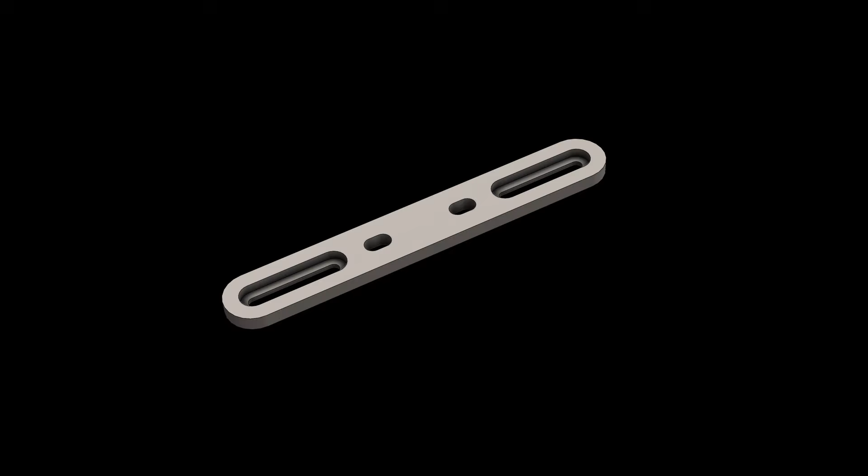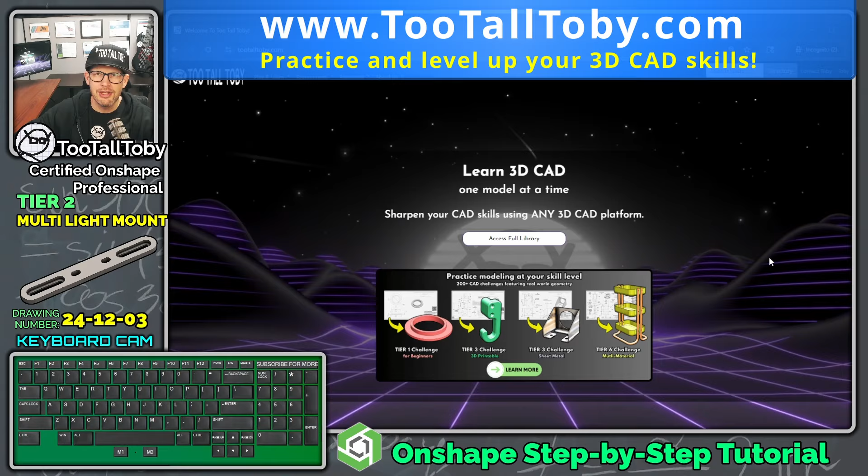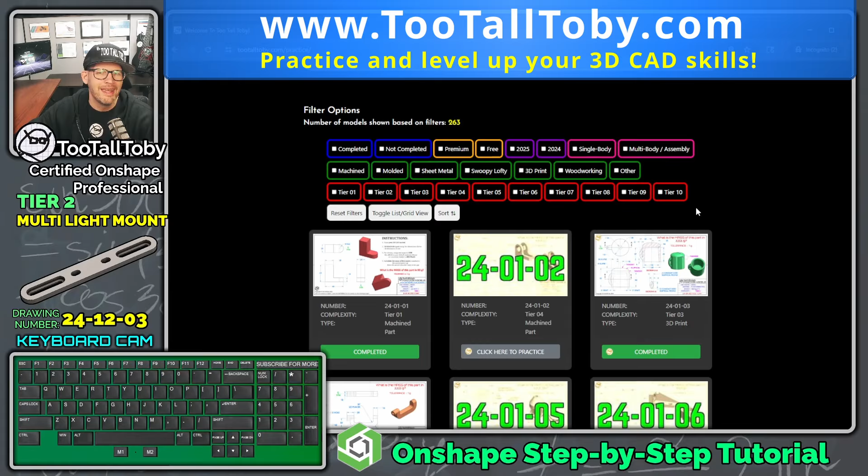So you can see here, if we access the full library, there's over 250 challenges, quite a few challenges here, a little bit difficult to sift through, except that we've got these amazing filters right at the top of the list. So if you're brand new to CAD, you could start out on Tier 1 challenges. These are the easiest challenges in the library, but we've already gone through all these. Each one of these has a tutorial.

So let's move on to Tier 2, and we can see that the next Tier 2 challenge that we're facing is this one here, 24-12-03. So we're going to click here to practice, and it looks like there are 160 people who have successfully solved this, and it's got an average solve time of 7 minutes and 53 seconds.

So let's get into it here. Click here to begin, and go!

So the question here is, what is the mass of this part in XXX grams? The tolerance is plus or minus 1 gram. The material is 1060 aluminum, and the unit system is millimeters. A little bit of a tricky part here.

We do have some symmetry, so that tells me we could maybe model half the part and then mirror it at the end. But let's take a look at our game plan here.

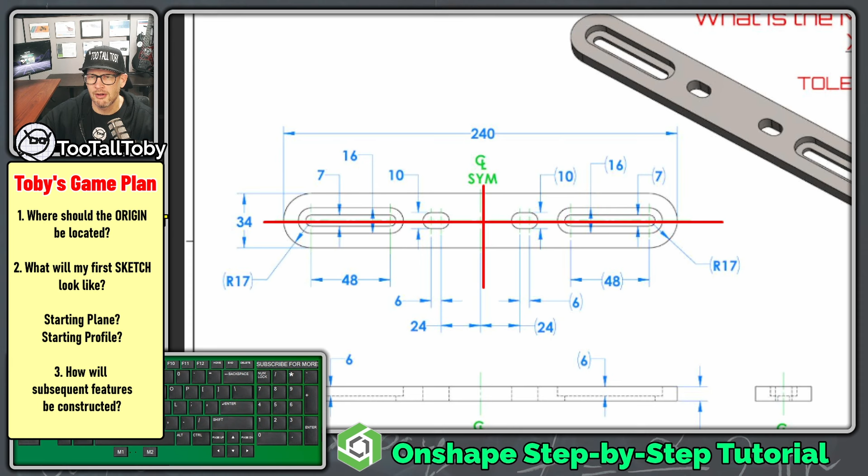One of the first things we're going to ask ourselves is, where should the origin be located in this model? And I think since we've got symmetry in this direction, and it looks like symmetry in this direction, I think that what we could do here is we could say the origin is going to be right here, right at the middle of the part.

And when I'm not really sure how the part is going to be used, what I'll typically do is put the origin on the very bottom of the part as well. So now we have a good location for the origin. Now we can start talking about what our game plan is for this model.

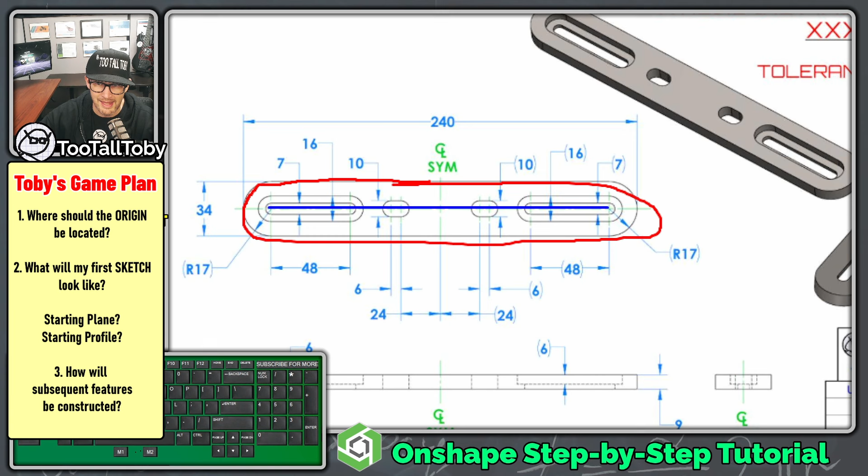And I think what I'll do is my very first sketch is going to be just a line in Onshape. And once I create that line in Onshape, what I can do is I can use the slot command to kind of offset that line out to a slot shape. And then I'm going to take that shape and extrude it up to a height of 9 millimeters. Now from there, what I can do is I can focus on these shapes over here.

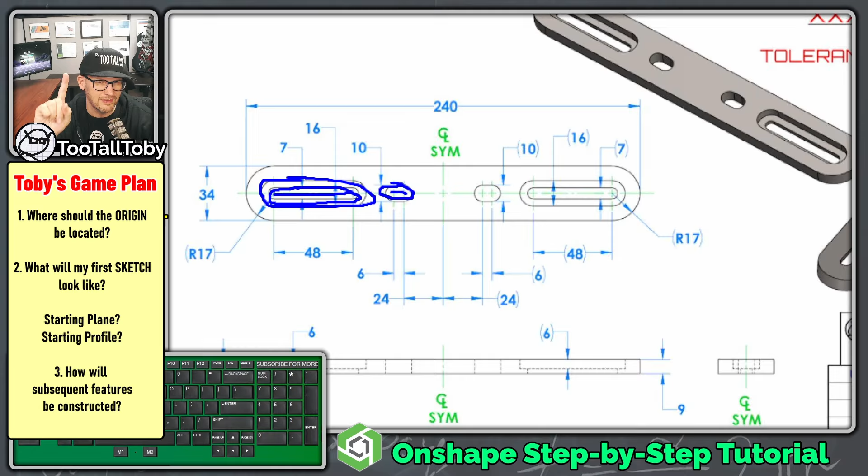So I think what I can do is once again create a line and then offset that line to create this inner slot and offset that line to create this outer slot. And maybe I'll also create a line here and then offset that geometry to create this slot. I think I'm going to do that all in one sketch. And then I'll use that sketch for 3 different features.

So what I'll do is I'll make my first feature here as this slot. I'll make my second feature as this slot here. And then I'll make my final feature as the kind of counterbore slot shape that's only going down to a depth here of 6 millimeters.

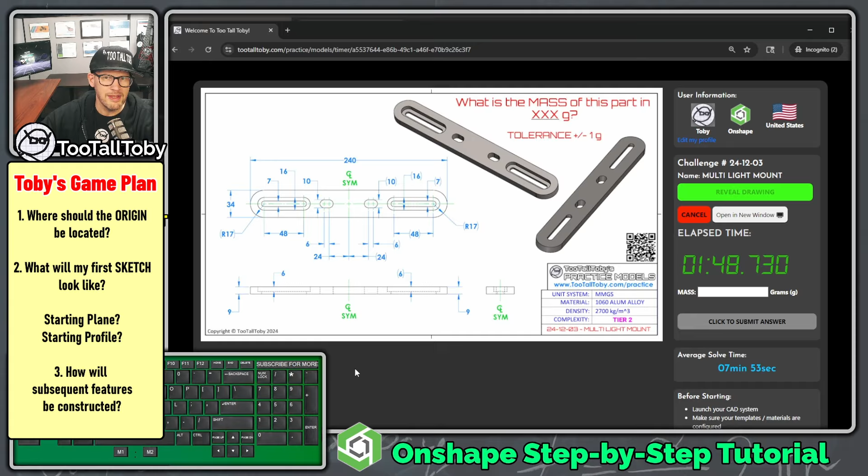And once I'm done with that, I should be able to mirror those slots over, and then I should be done with this model. So it's going to take a few features, it's going to take a little bit of advanced functionality, but hey, this is what's nice about going through and doing these practice models. We get to learn some new functionality in the software.

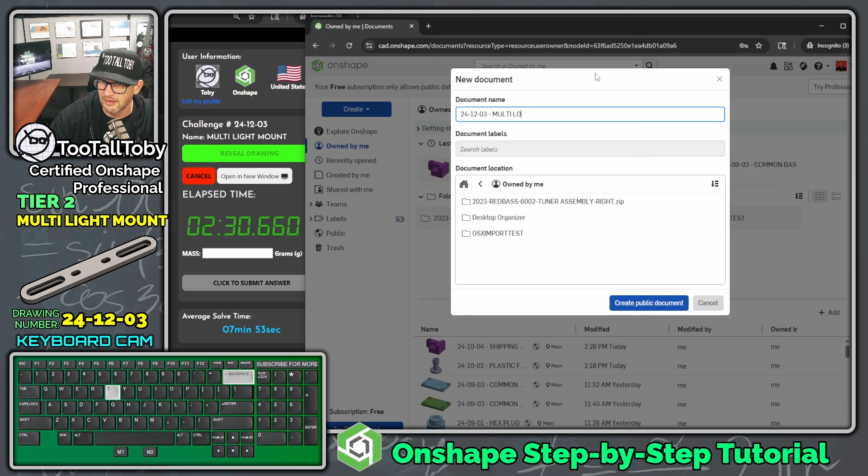So here we are in Onshape. We're going to say create document. 24-12-03 multi-light mount. And I'm going to create this in the public space. So if you're ever in Onshape, you can search the public space and you can find this model in case you get stuck or you want to see what my feature tree looks like.

Up here at the top in this hamburger menu, we can control our unit system, but I'm always working in millimeters by default, so I don't really have to worry about changing that for this example, but if you did have to change it, that's where you do it.

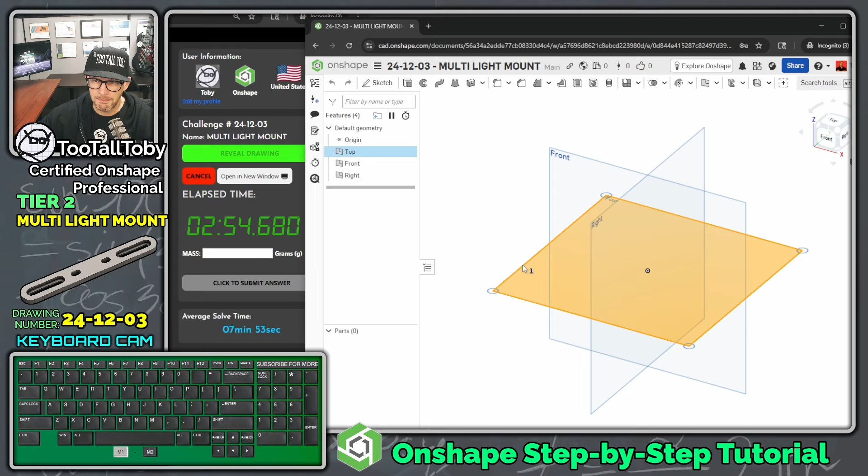Top plane, S key, begin a sketch, N key to get normal to, S key to begin a line, and I'm going to create a line here that looks like this, just kind of out in space, and that line is going to have a length of, looks like this is going to be 240 minus 17 minus 17. So 206 there to go center to center on those radii.

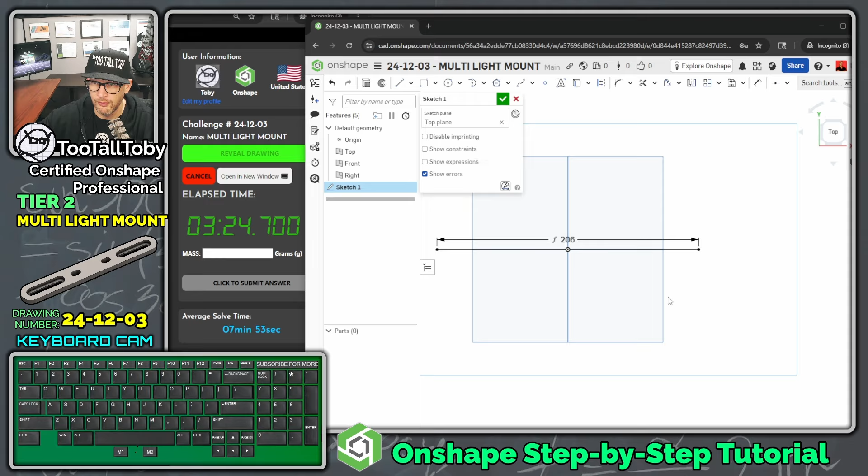And I'm going to hit escape, and then I'm going to click on that line. I'm going to click over here on the origin, and I'm going to press Shift M. That's the shortcut for midpoint, Shift M. Now, if you're not sure where the slot command is on your toolbars, you can just go up here and say search tools, and you can type in slot, and then that launches the slot command.

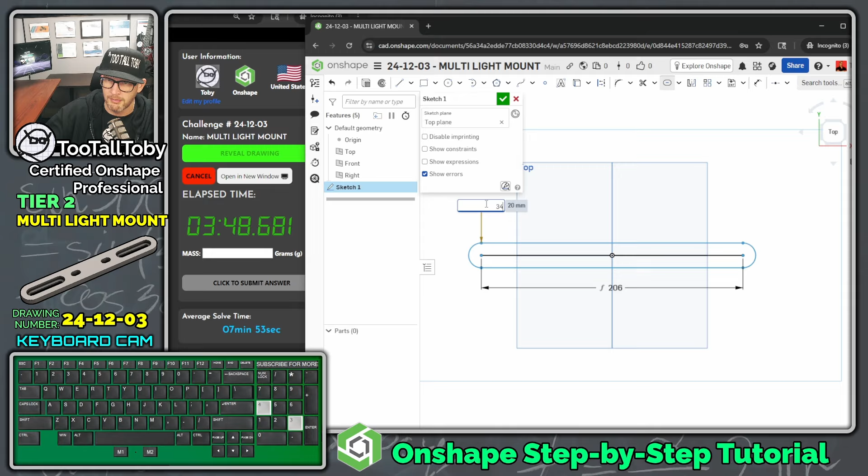Now we're going to click on a line, and here we see that Onshape is going to give us a slot relative to that line, and this slot is going to have a distance dimension here of 34 millimeters. 34, enter, enter, and that is what your first sketch should look like. So 34 millimeters, 206 millimeters. Let's go. This looks pretty good.

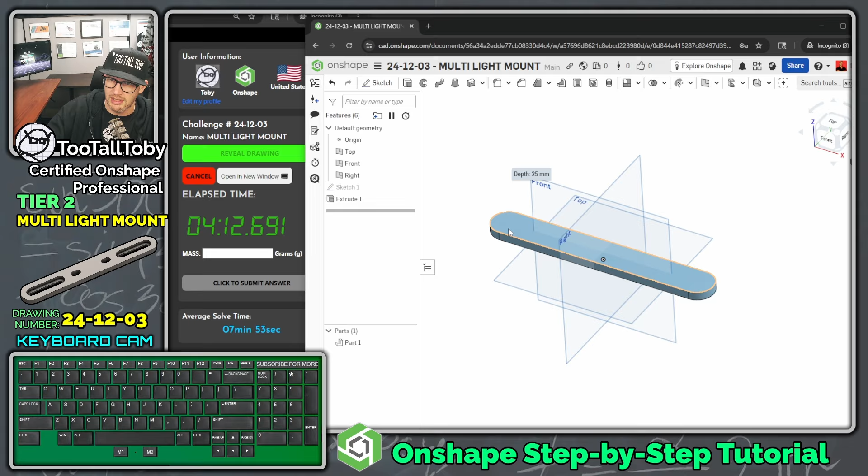S key extrude, and this is going to come up here to a height of 9 millimeters. Enter, and enter. All right, and there is our first feature. So now for our second sketch, we're going to create all the remaining geometry here in this one sketch. So I'm going to pick this top face, S key, begin a sketch. I'm going to press the letter N.

Now, if your view gets oriented incorrectly, like if it looks like this, you can always press Shift 5. That is the default shortcut key for top view, and that might help you get oriented the same as what I'm doing here in the tutorial. And we're just going to model half of this thing.

So we're going to create a line here, S key line. We'll create a line here that comes over like this, start at the origin and move over, single click. That's going to be at 24 millimeters, enter. And then we're going to move over in this direction, and we're going to single click, and that's going to be at 6 millimeters, enter. And then you can hit escape.

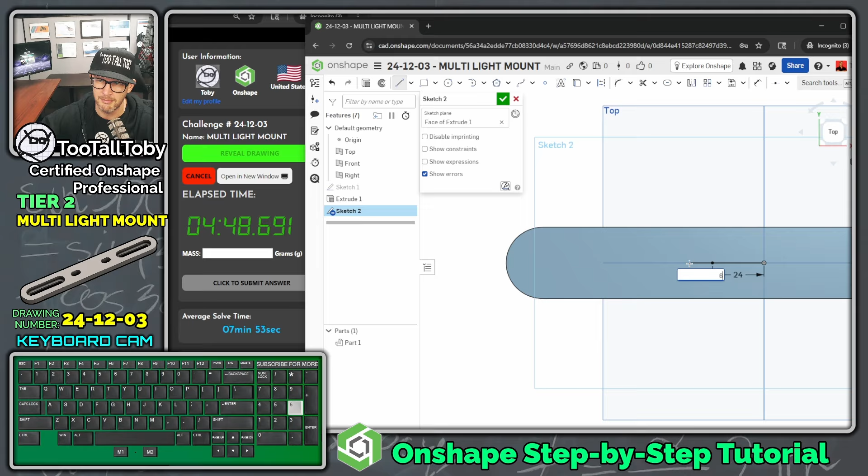And then what you can do is you can click on that line and you can launch the slot command again. So up here, we can type in slot. And there it is, the slot command. And this time we're going to create a slot here with a diameter of 10. Enter, enter. Okay, so little trick you can do there. You can draw in a line right from the origin to give you that 24 dimension instead of having to add the dimension.

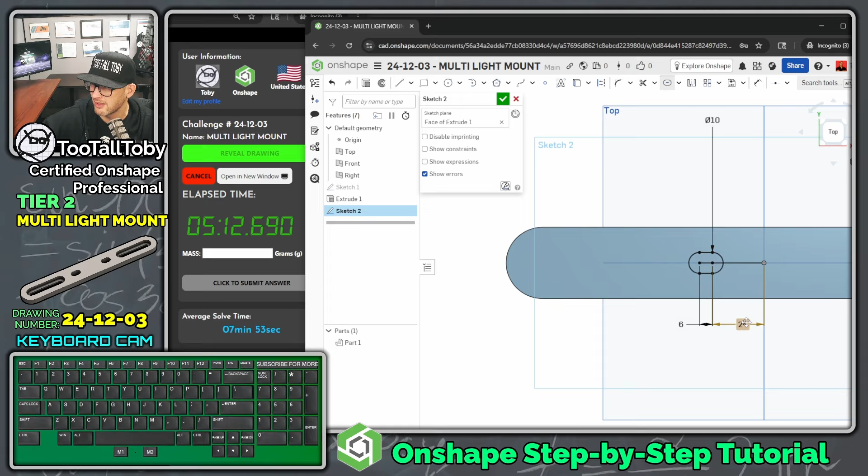Now on this side over here, we can begin the line command and we can just kind of wake up this center point. So you just put your mouse over the arc there and then move down to the center, single click, move your mouse over in this direction, single click, let go of your mouse. That distance is going to be 48, enter.

And then we can hit escape and then we can click on that line. We can go up here to the slot command again, slot, and enter, and there we go. And that is going to have a diameter there of 7. So you double click here on the 10, 7, enter, enter. And then you can click on that line again. And now you see you're getting a second dimension here.

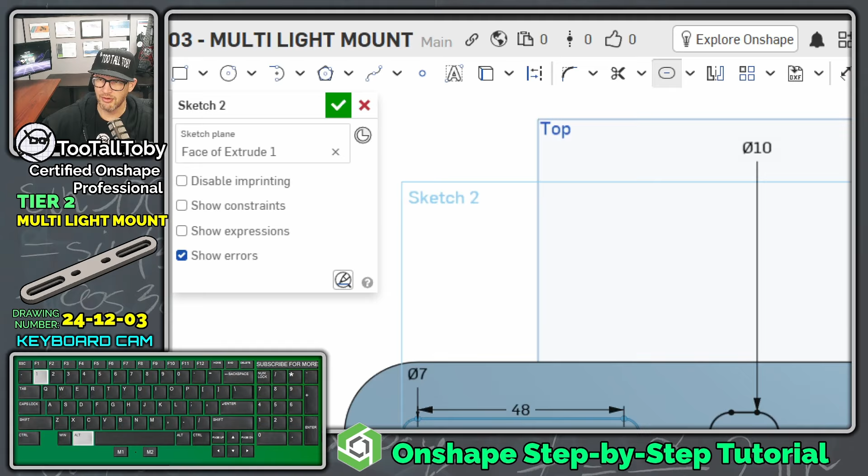So basically you're still in the slot command. If you have it on your toolbar, you can see here that it's enabled or it's pressed in. So when we clicked on that line a second time, we got a second dimension here. Well, we're going to double click on that one and we're going to make that one 16, enter, and enter, and there we go. Now we're done with that feature.

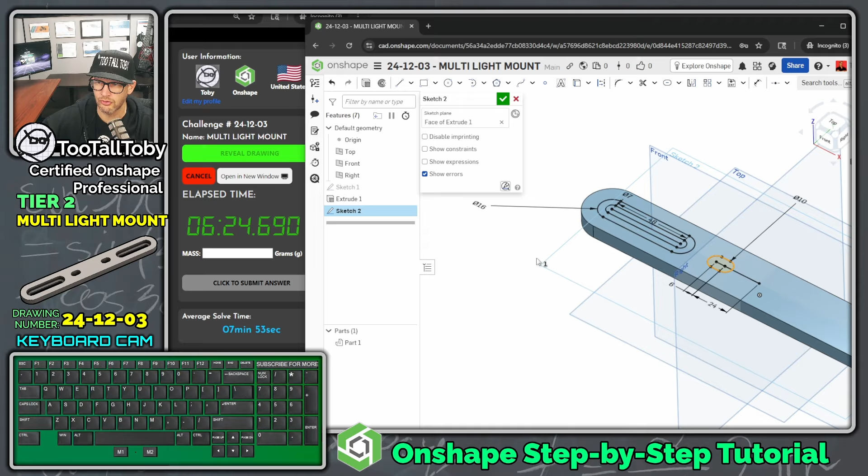Now at this point we can jump into the extrude command. What you could do here if you want to save a step is you can hit escape and then just click here inside of this region, and then you can launch the extrude command. So extrude, remove through all, and that'll take that region and turn that region into a cut. So that's a nice little shortcut to streamline the process of making those selections. So now you can hit the green check mark. So take that region, extrude, solid, remove, through all, hit the green check mark.

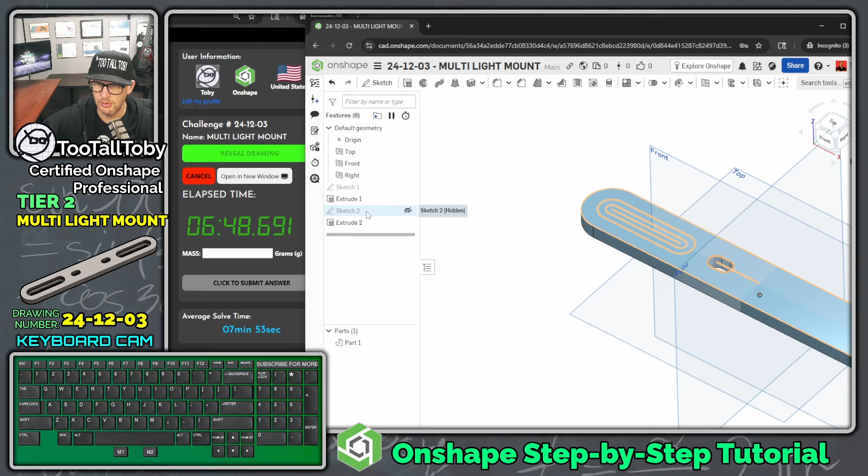And now we're going to come over here to this sketch 2 in the tree, and we're going to choose to show that sketch because it's got all that geometry that we need for our next feature. And now we can do the same thing. We can pick this region here. Now, if you can't seem to get that region, you can use this key that's up here on your keyboard. I'm going to just click on it, and you can see it's highlighting there in my keyboard overlay. I call it the tilde key. It's also got the little almost like an apostrophe symbol on it. But if you go up in that region and you click on that button, that can also help you get through and get the region that you want.

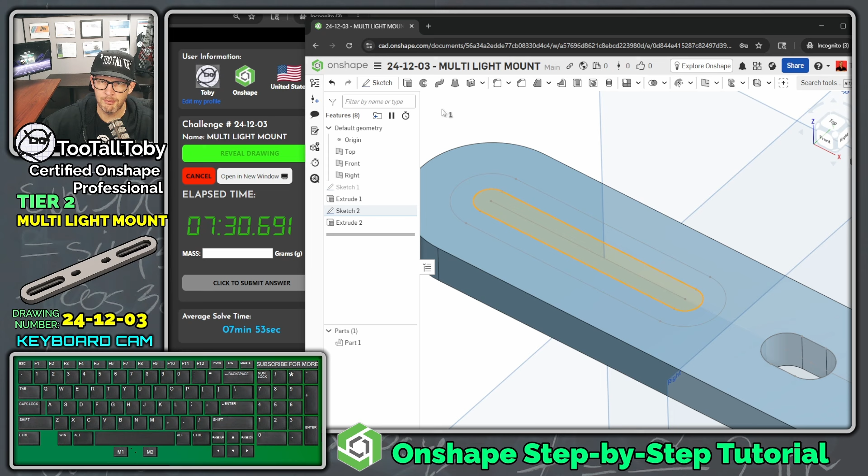So you'll see here that once you click on that button, you get this list here, and one of the items in this list is face of sketch 2. So then if I click there, you see that highlights that region. So now I could jump into the extrude command, and this extrude is going to be remove through all, and hit the green check mark, and there we go.

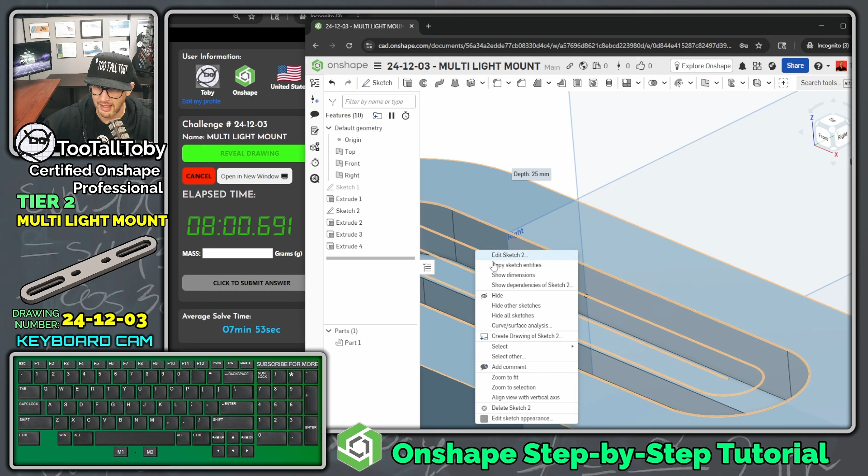And now again, I'm going to try and get this region. This time it looks like it's a little easier for me to select it. So I'll just put my mouse there, left click, and then extrude, remove, and this one's just going to go down to a depth of 6 millimeters. 6, enter, and enter. And there we go. We're now done with that sketch. So you could find that sketch here in the graphics area. If you don't want to see it, you can right click on it and you can choose hide. It's another way to get those sketches to hide.

And now all that's left to do is just mirror those holes across to the other side. And we can do that with the mirror command. If you can't find the command on your toolbar, you can just type in up here, mirror. Of course, all these commands are on my toolbar. It's just I've got everything compressed for the tutorial. So we're going to do mirror, and then this is going to be a feature mirror. We're not going to mirror the whole part. We're not going to mirror everything. We're going to do a feature mirror.

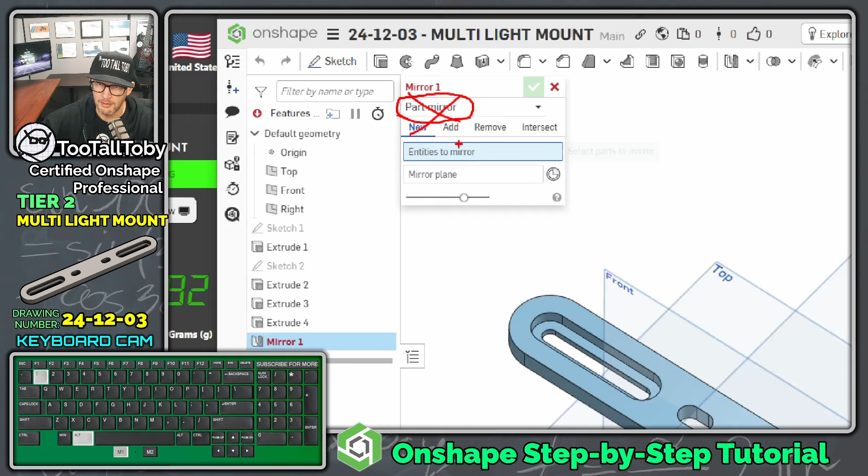And the features that we're going to mirror are going to be this cut down here at the very bottom, this cut here, which is for the counterbore, and this cut here. Now, this is a great example of where renaming your items in the tree can be really helpful, because instead of seeing extrude 2, extrude 3, extrude 4, we could rename those things. We'll call this one here, Shift N, inner small slot cut. Okay, and then I'm going to click in the background so nothing is selected. Click on this one, Shift N, outer thin long slot cut.

Enter, and then click here, click over here, Shift N, outer C-bore slot cut. Okay, much easier to understand what your features are when you rename them in the tree. You know, this sketch here that we used for those multiple features, Shift N, we could call this something like multi-feature sketch contours, slots, something like that. Okay, you could rename it.

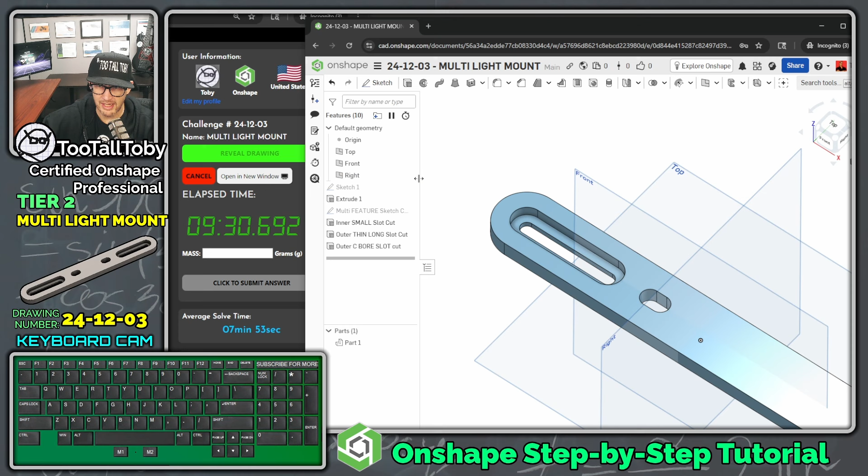Probably with this one, I probably would put slots first in the title. So I'd call this like sketch slots multi-feature sketch contour, something like that, so that at a glance I understand, oh, this is kind of a special sketch here.

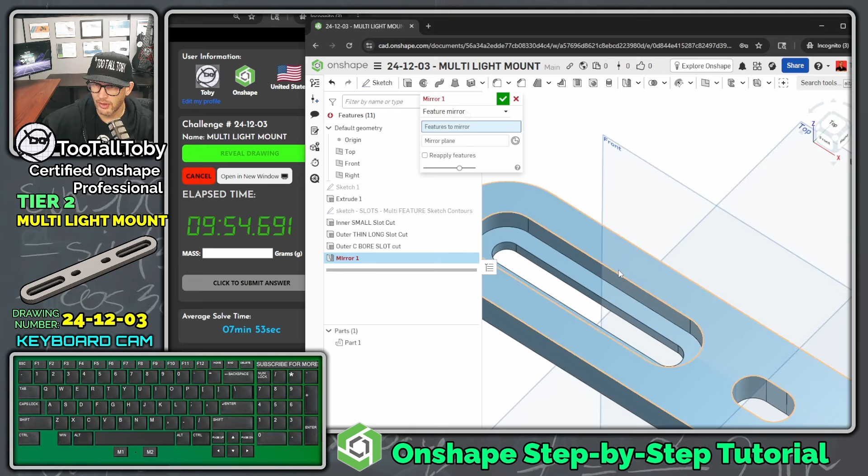All right, so now if I go into the mirror command, mirror, now what I can do is I can say features to mirror, and now when I go through and I pick those same faces, this face down here, okay, that's the outer thin long slot cut. This face here, that's the outer C-bore slot cut. And then this face here, that is the inner small slot cut.

So now that I've gone through and I've picked those faces, I can go down here to mirror plane. It's going to be this plane right here. That's going to take that geometry, mirror it across. Yo, this thing is looking good. Feature mirror, that's what's up in Onshape.

And so now that we're done with all those features, this overall model looks pretty good. I can press the letter P to hide my planes. I can look around here, kind of do what we call the final spin, make sure it looks good. I can come down here to the name of the part, right click on the name of the part, and I can say edit appearance.

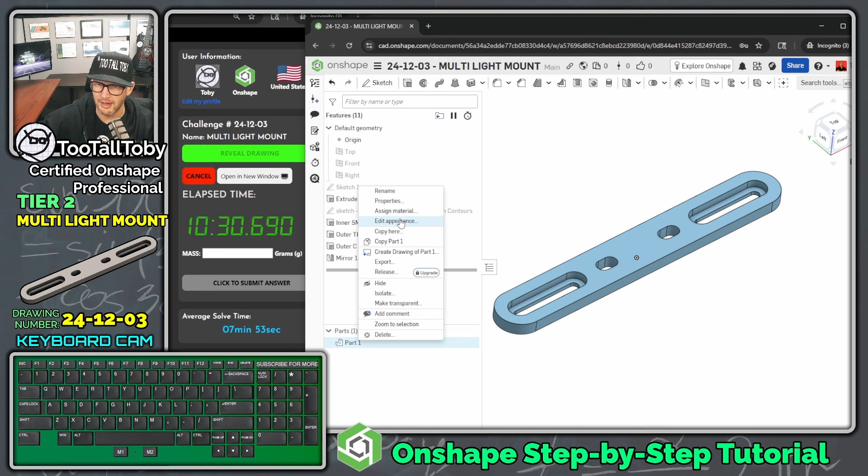And we can change this appearance here to be kind of like a gray appearance. We can come down here to this icon down here. This is the icon for mass properties. Oh, I missed a step. We got to assign the material. So we're going to right click here on the name of the part. We're going to say assign material.

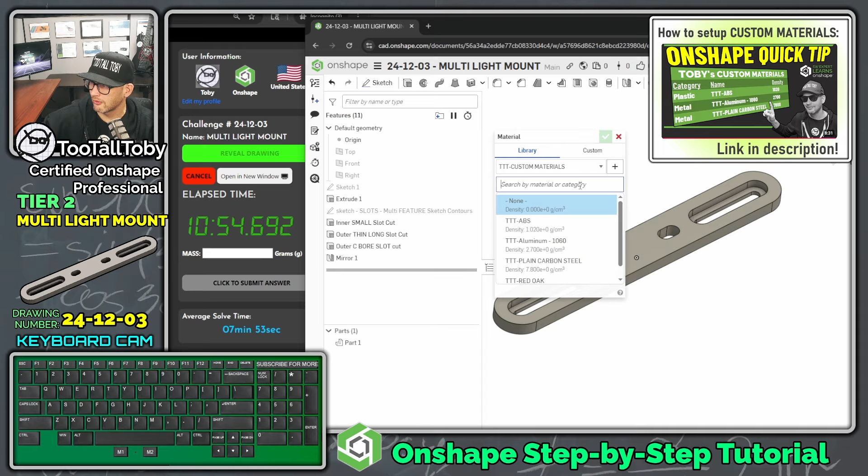And then from this material here, we're going to say from the TooTallToby custom materials library. I'll include a link down in the description to a video on how to set up this library. But this one's going to be using aluminum 1060. Hit the green check mark. Now we can measure the mass because now we've got the appropriate material density. So it looks like we're coming up with the mass here of 148.1 grams.

Let's take a look at the app and see if we got it correct. So 148.1 and enter. And oh yeah, we got it. We got it correct. 148.1 grams is correct. We did it in 11 minutes and 16 seconds, a little bit slower than the average time, 7 minutes and 53 seconds, but that's all right.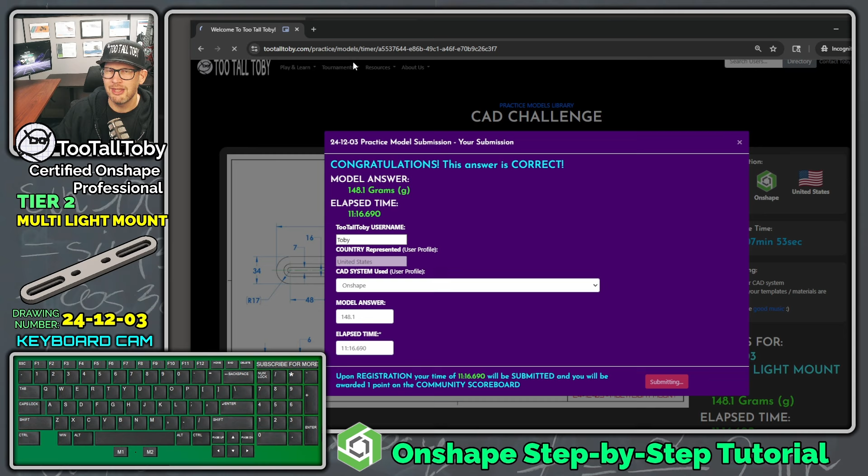We can always go back and keep practicing and keep refining our workflows, and we could use the try again function. We did it in 11 minutes and 16 seconds. If we want to do it faster, we could do try again. See if now that we've got a game plan down, if we can go a little bit faster, a little bit smoother, and that's really the whole point of the TooTallToby app.